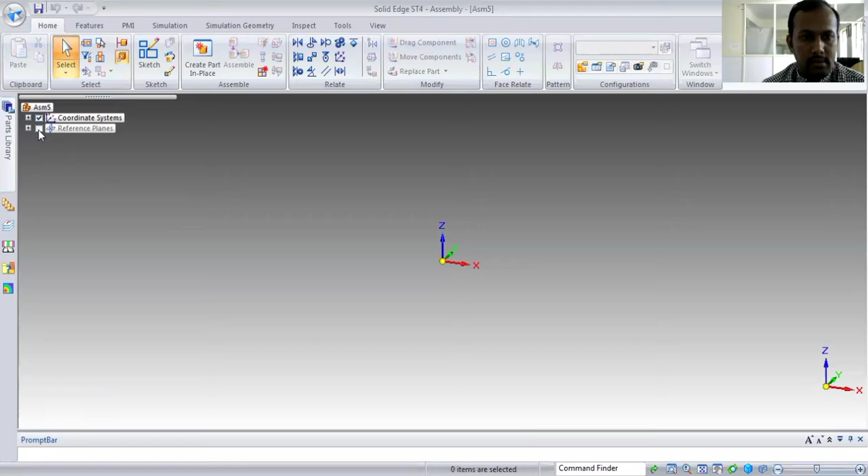First you have to open the ISO assembly in the Solid Edge software. Switch on the reference planes, then go for part library. If it's not shown, you have to go for view. Here, if you open in the left side, you'll get the part library, open that one. All the parts will be saved, meaning it will be shown.

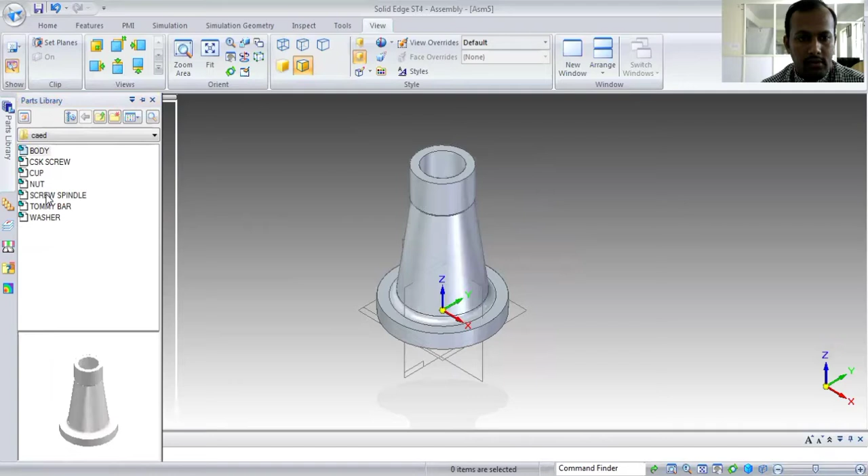First you have to select the body, drag this one here. Next you have to go for the nut, drag the nut here to the body. Next you have to select the bottom of the nut and select inside the body, so it will be collinear, right?

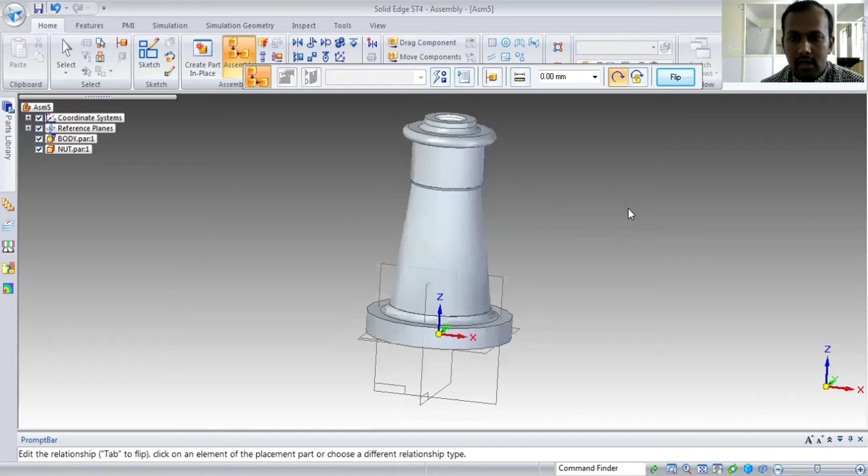Next you have to assemble properly. Go for home, then assemble, just click the assemble part. Click the bottom circle here and click the top circle here. Check by pressing Ctrl F, so properly it will be fixed. Next Ctrl I, next you have to go for the screw spindle.

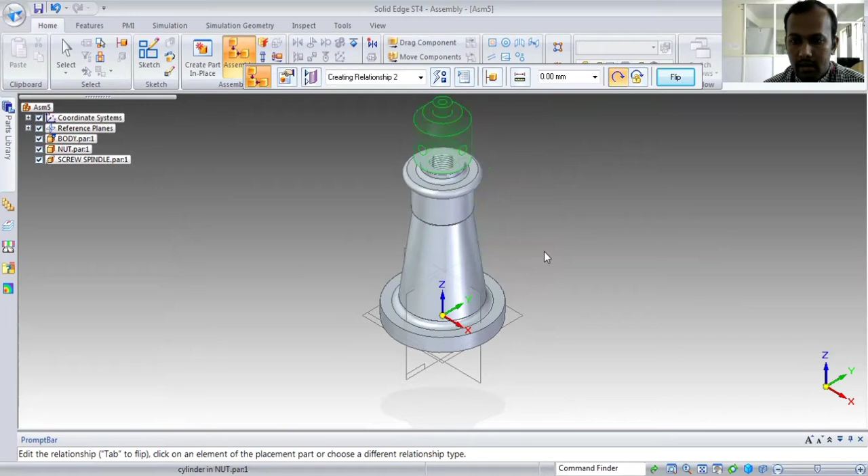Select the screw spindle and drag it. You have to select the threaded part, and in the nut you have to select the threaded part, so it will properly assemble. Just drag it upwards.

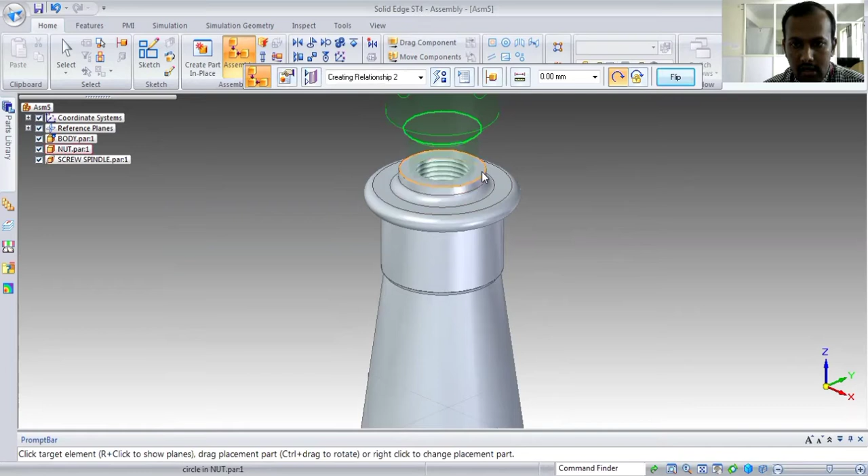Now go for click the assembly part, you can see, just rotate it. You will get the circle, small circle, zoom it, you will get the small circle. Click the top of the nut, so it will be fixed. Next, fit page.

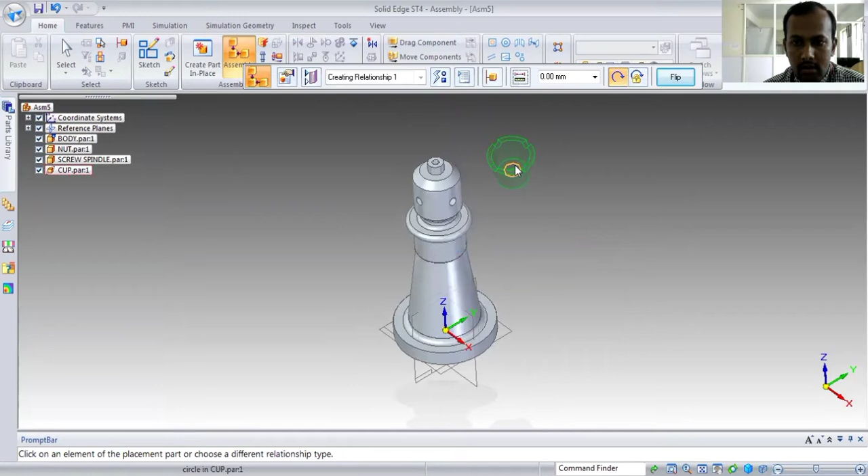Next you have to assemble the cup. Drag the cup, rotate the top face, close the rotation, you can select and zoom it. Carefully select this part, it will show the double circle. Then upper face, or you can select the body here directly, it will be fixed.

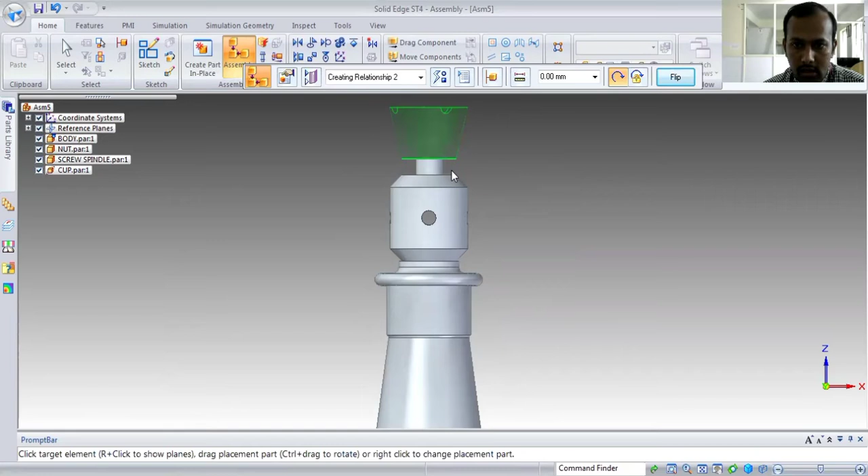If you select Ctrl F, you can look at this one, it's not properly fixed. Just drag it, fit the page, zoom this one, drag it upwards. Go for assembly, click the assembly, select the bottom circle and the top of the spindle, so it will be fixed properly. Ctrl I for isometric view.

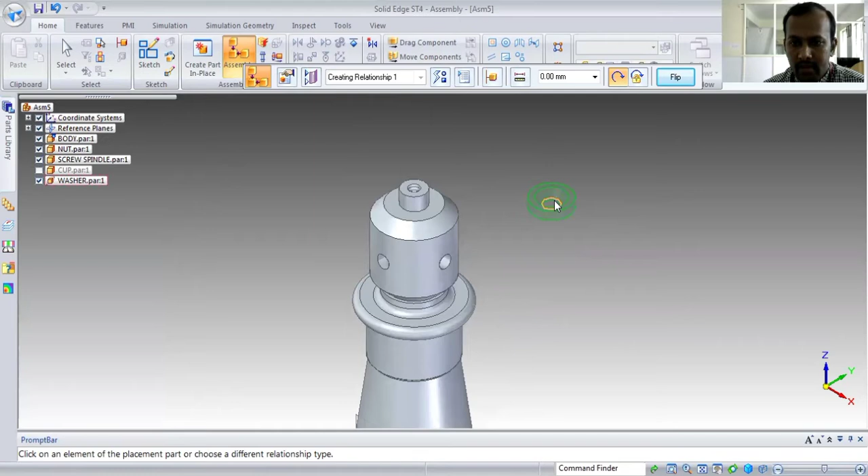Next, inside the cup you have to place the washer. Drag the washer. To fix it inside, you have to switch off the cup first, so now we can look at this one. Select the washer inside circle, and select the threaded circle, so it will be placed like this.

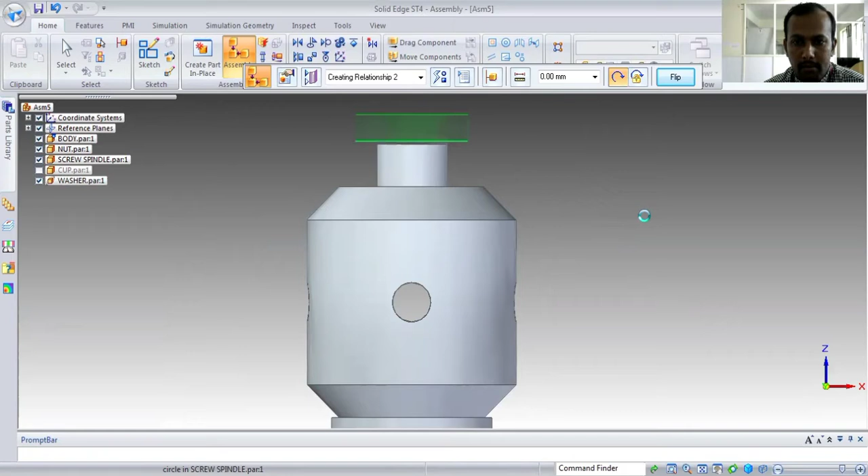Again Ctrl F, you can look at this one, it's not properly fixed here. Drag it upwards. Select the assembly part, bottom of the circle and top circle of the spindle, so it will be placed properly. Next, again Ctrl I.

Zoom this one, next select the CSK screw. Drag this one, here you have to select the threaded part of the screw and threaded part of the spindle, now it is collinear. Next you have to select the top of the screw and top of the washer, see, now it will be fixed properly.

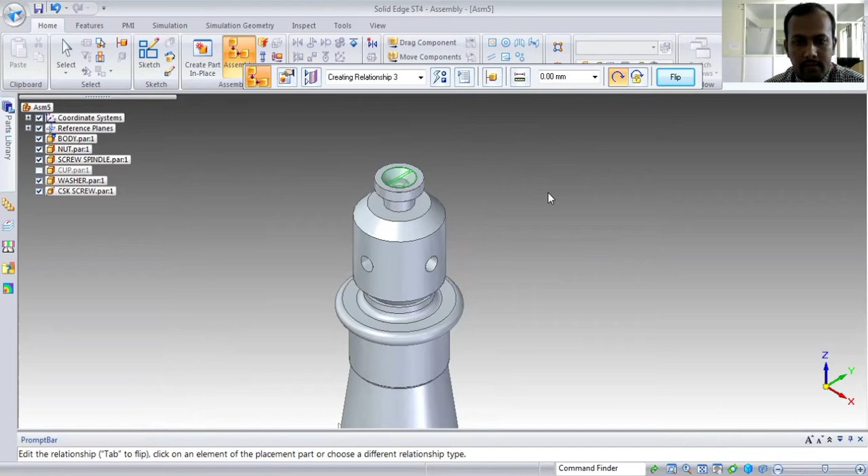Next, switch on the cup, and final part is the tommy bar. Drag this one, drag it a little bit here like this.

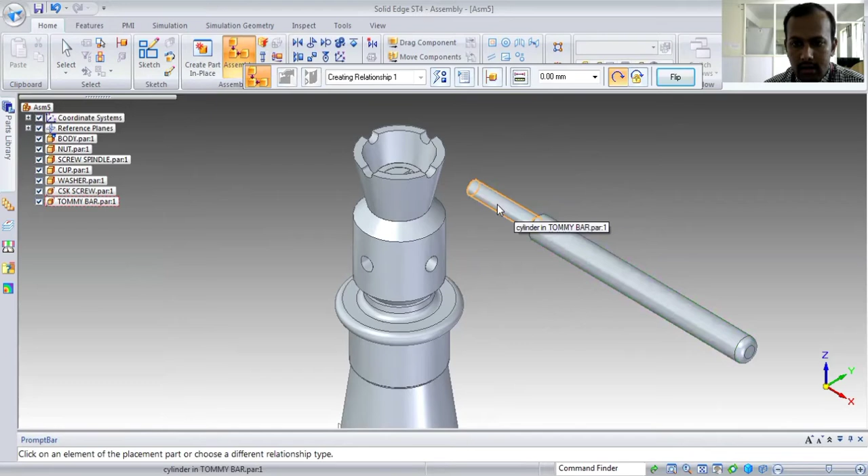Now you have to select, go for assembly, select this part, front of the tommy bar, and inside carefully select it like this, zoom it, you'll get the hole, select it like this, so it will be fixed here, but you have to push it inside, Ctrl F for the front view. Now you can easily push up to this line, push it like this, up to this line. Fixed. Next, again Ctrl F.

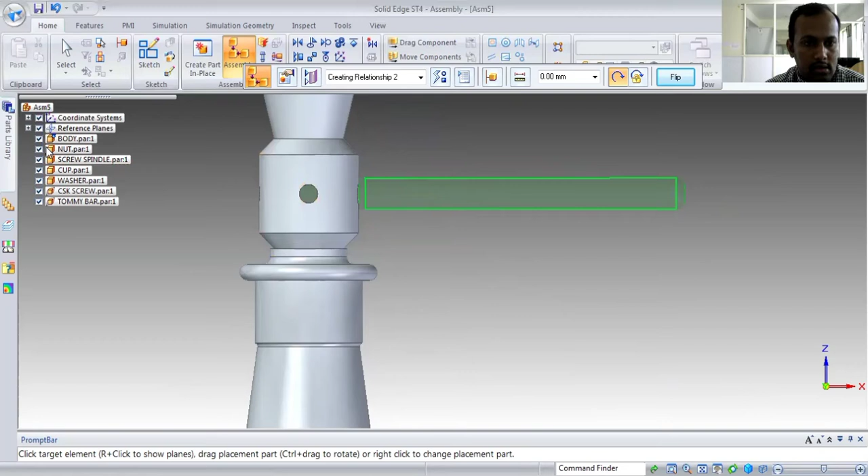Before Ctrl F, you can see this, you have to give the height, a little bit of height about the nut and the spindle, you have to give some distance. Select the nut, right click the nut here. Control I.

Okay, close it, right click this one. The scale will be open here. The body, initially body is shown. Go for spindle. You can see the distance here, 0 is there. So make it 30, enter.

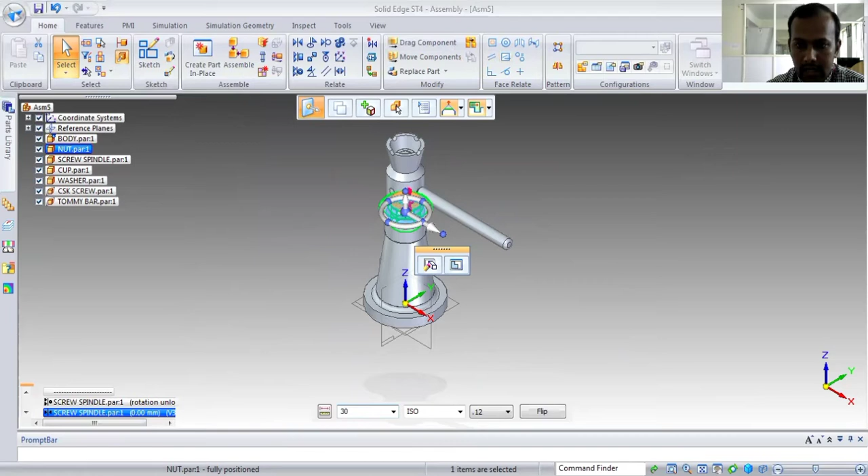Okay, next again Control I, you can look at this one. I will show the Control F front view, look at this one. Some distance will be raised. Okay, again Control I, this is the 3D view.

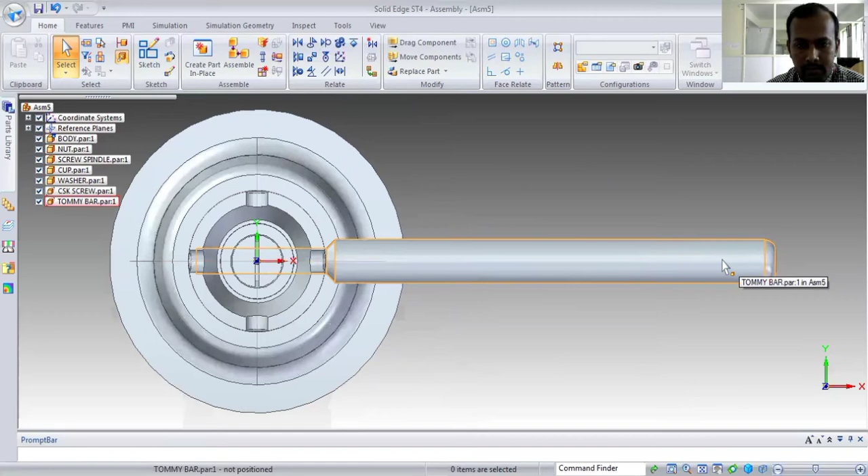So if you press Control T, this is the top view. You can clearly see 180 degrees is placed. Control B is the bottom view, Control T is the top view, Control F is the front view, and Control I is the isometric view.

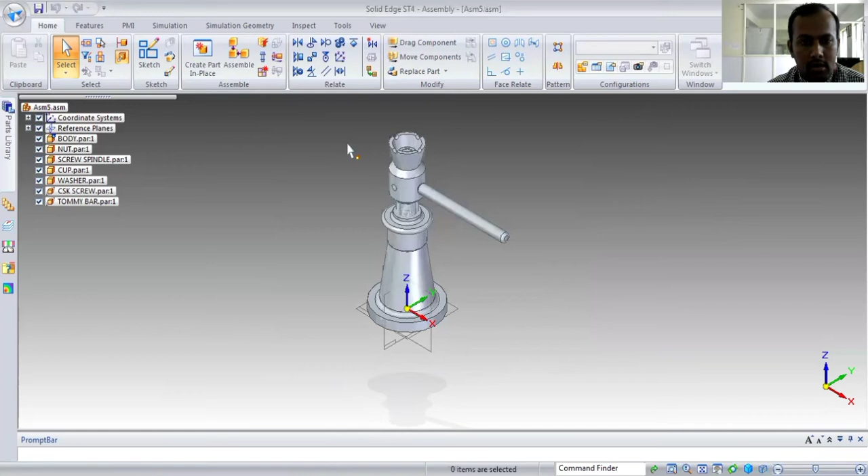So save this one. Anywhere you can save it. Okay, saved now. Now you can go for the sectional part.

So convert first this one to the 2D drawing. Next use the front view, next use the top view. This is bottom view, this is top view, this is left side, right side view, this is left side view, this is isometric view. Okay, I will finish this one.

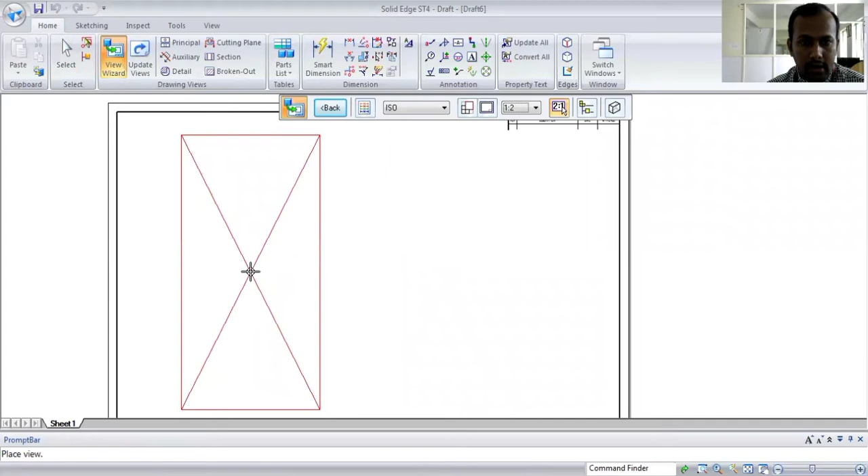So in this page, wherever you want, you can fix the center, but you can fix it at the left hand side. So now we can available.

So visible lines are dark, invisible lines are dashed lines. Okay, so this is the front view of the screw jack, and this is the top view of the screw jack. You need to draw the sectional part, so I will delete this one.

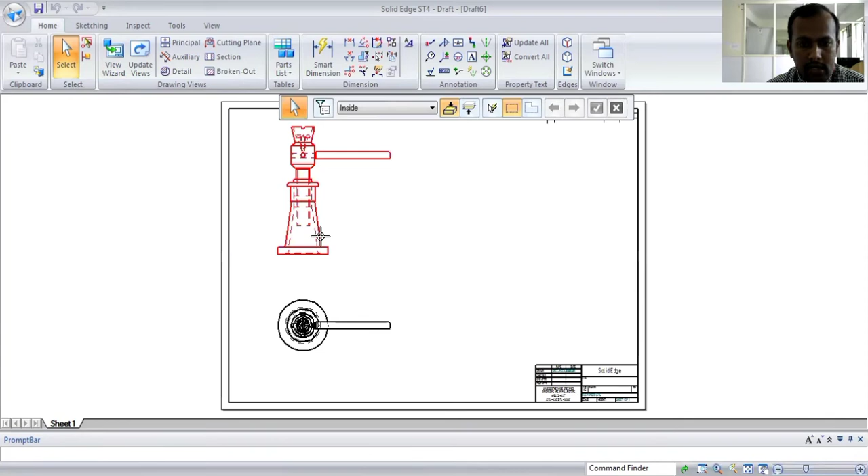And I will go for the sheet setup. So convert A2 to A4 sheet, deselect the background, save default. Okay, now fit the page. So take the diagram in one end, and since the dimension is big, convert the scale into 1:5.

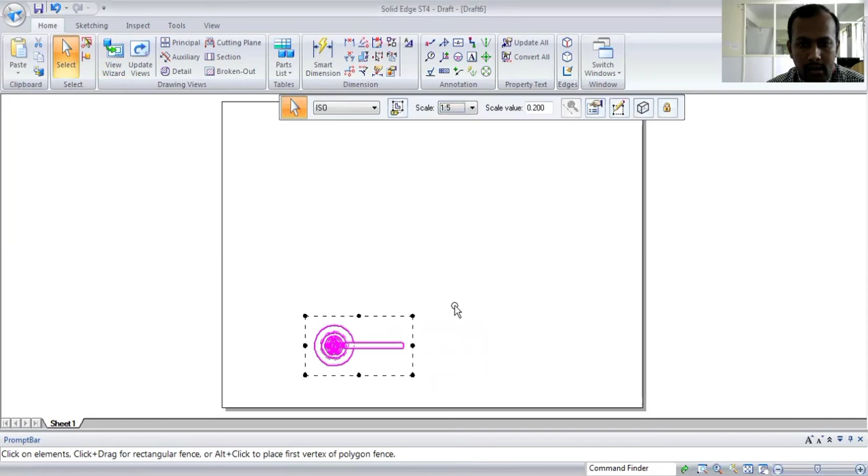Okay, so now you can go for the cutting plane, select the cutting plane command. Select the diagram first, then zoom in this one. Exactly at the center you have to start.

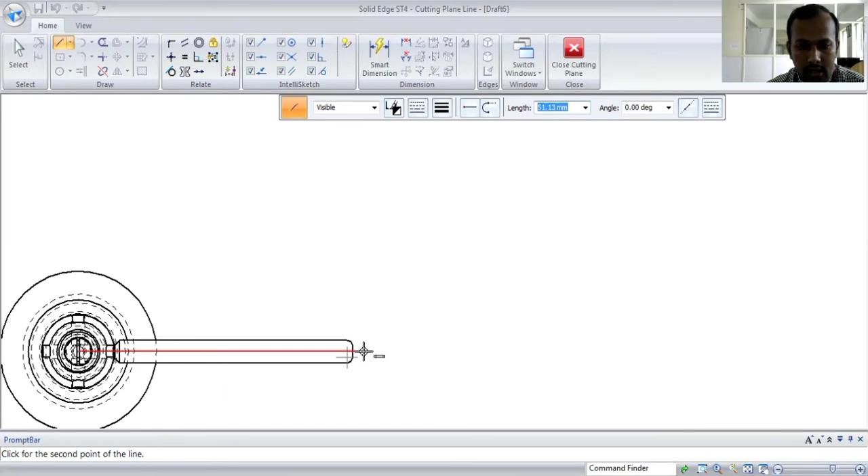Click it like this and click the straight line. Exactly 180 degree, sorry, 0 degree. Okay, click it outside the diagram and click it the vertical diagram, as it is same.

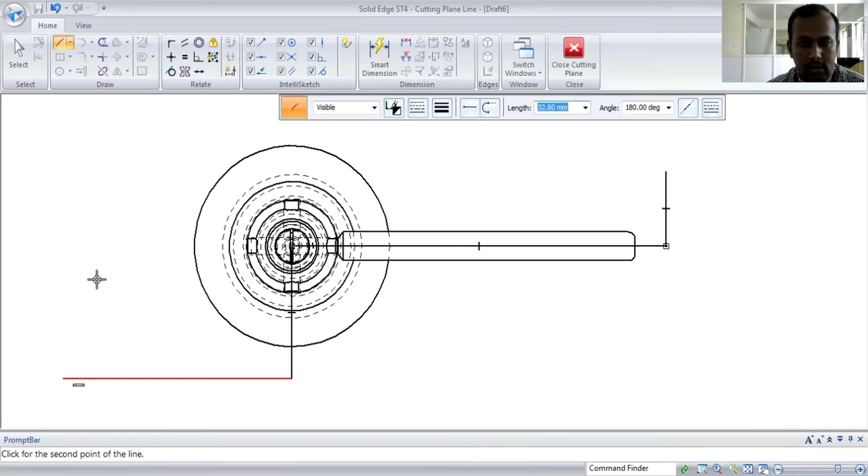So at the end of the line, vertical line downwards, minus 90 degree, and you have to take any distance of the, okay, then cutting line, close it. So you can see the section A, single line.

Okay, so then you can go for the section part. So select the line first, again select the line. It will show the front view of the section plane visible. Okay, you can see this one. Half part is section - okay, this is not section part, this is the section part.

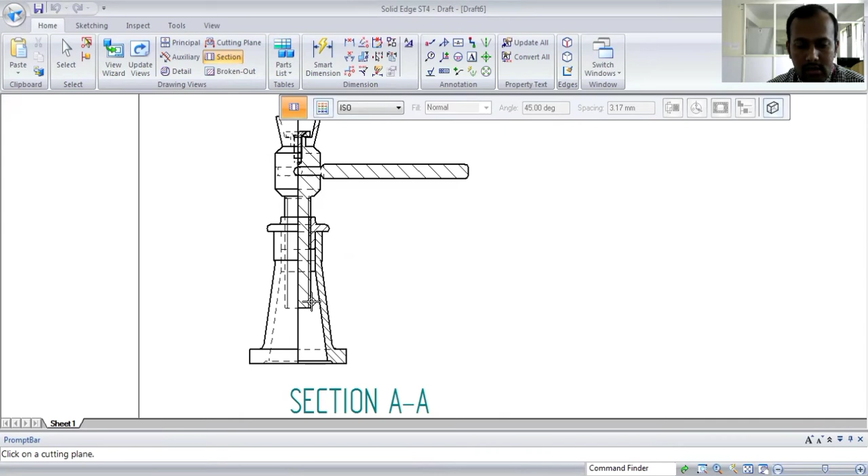Okay, so if you take the line like this, the full will be cut. Half, exactly 50% will be cut. Both inclined lines will be available this side also, right?

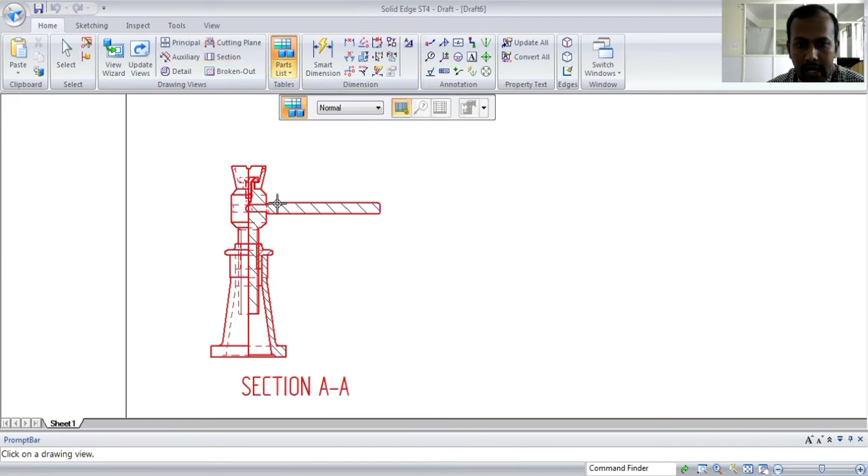So what are the parts of this screw jack? If you saved properly, if you go for the part list and select the diagram, the table will be available. You can place it like this. See, so part 1 it will show body, part 2 nut, part 3 screw spindle, then part 4 cup, part 5 washer, part 6 screw, CSK screw, part 7 tommy bar, according to the material.

Whatever material you gave when you saved, everything will come automatically. So document number will be empty, so you have to remove this one.

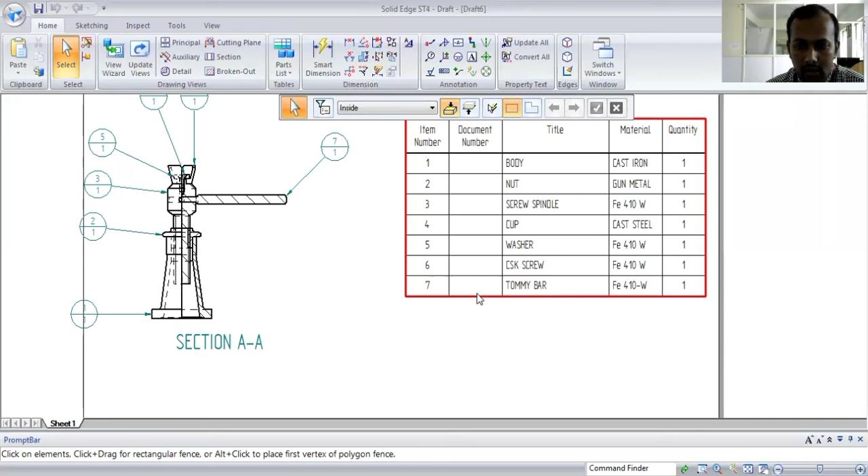Right click on table and properties, go for the columns here. Document number is not needed, delete column, apply. Okay, so now we can see without the document number column.

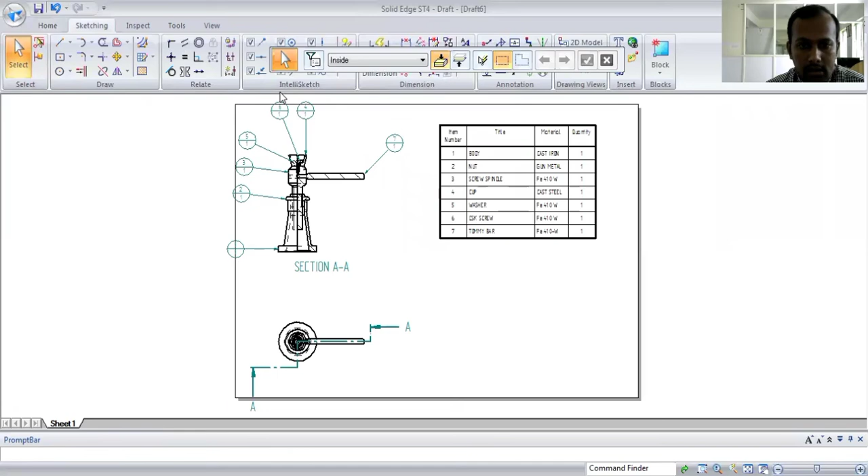So now another thing, we can look at this one. Yeah, so this is the numbering system, 1 by 1, 2 by 1, you have to remove that one.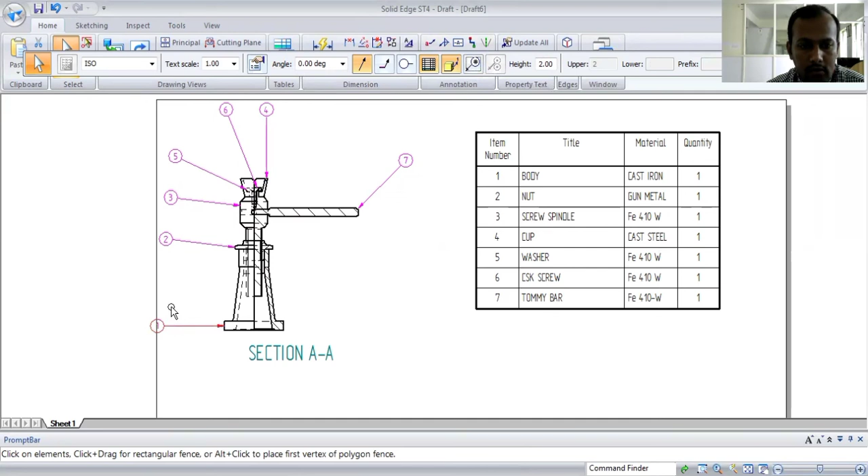So press Ctrl and select all these things. Okay, you can see the item count. Click this one, so it will come clearly 1, 2, 3, 4 like this, and everything including drawing, you have to take it inside the page.

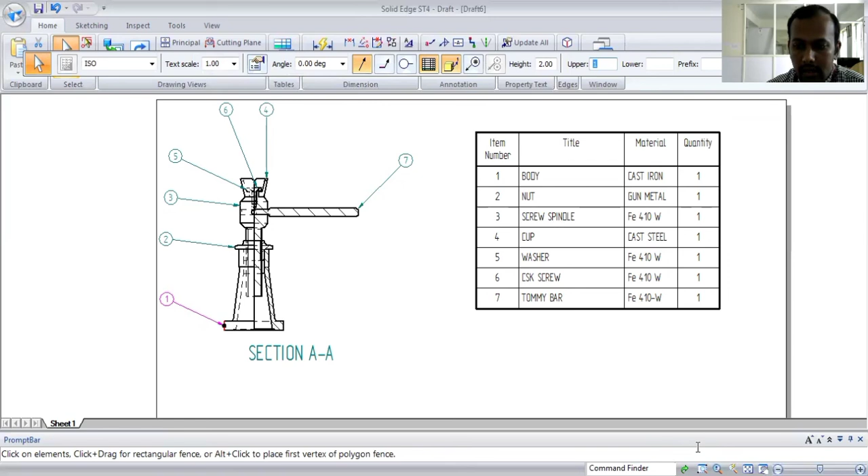Anything outside the page, take it inside the page. Okay, so now we can drag it upwards, okay, can drag it downwards this one. Okay, now we can take the printout of the screw jack assembly section.